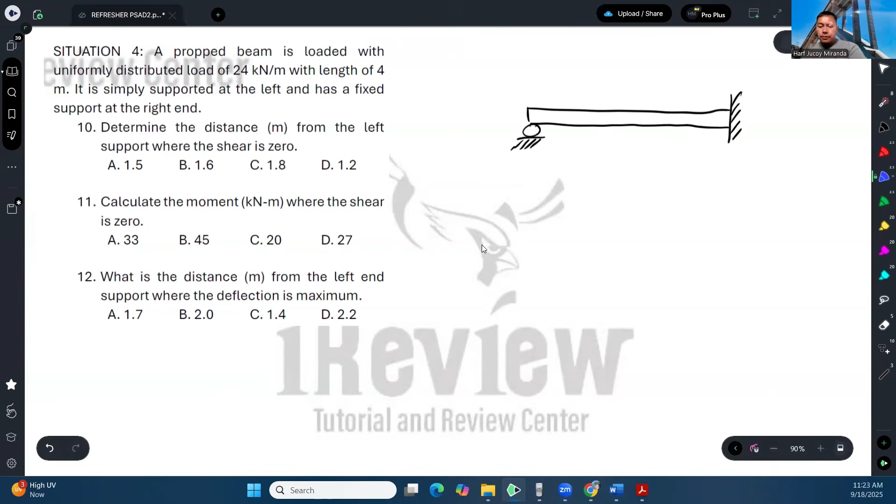There's a uniform load. So determine the distance from the left support where the shear is 0. Calculate the moment where the shear is 0. At what distance from the left end support is the deflection maximum. Those are the questions.

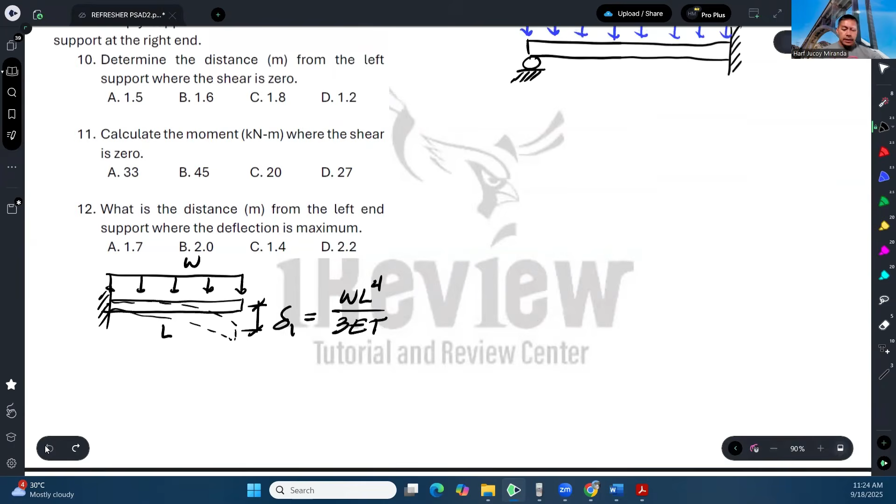So the deflection, delta 1, equals... since this is L, equals WL to the fourth over 8EI. Sorry, not 3, it's 8EI.

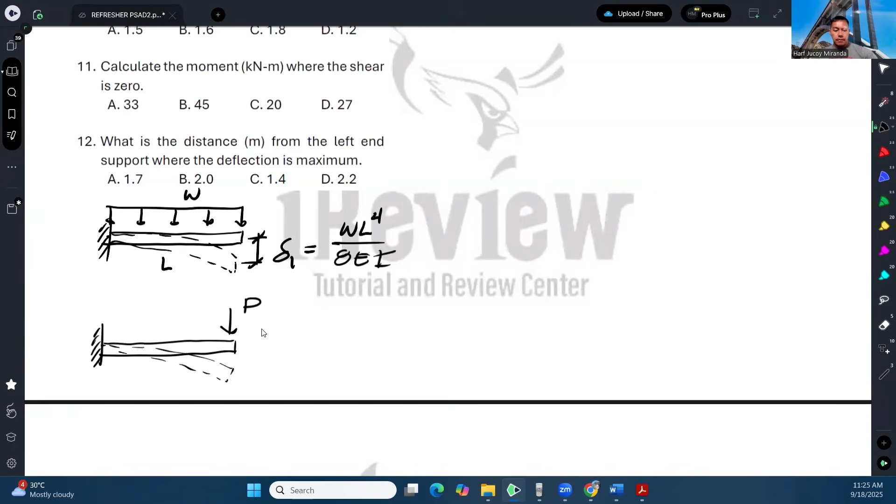Then for a cantilever with load P, the deflection becomes PL cubed over 3EI.

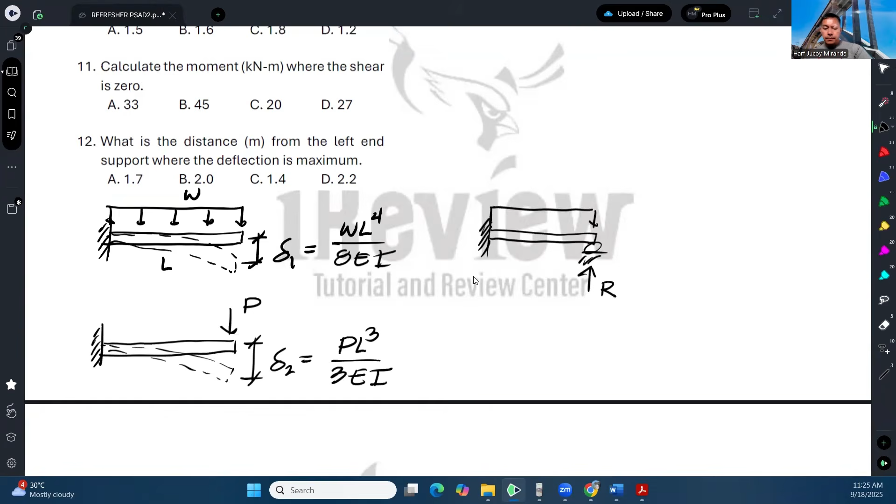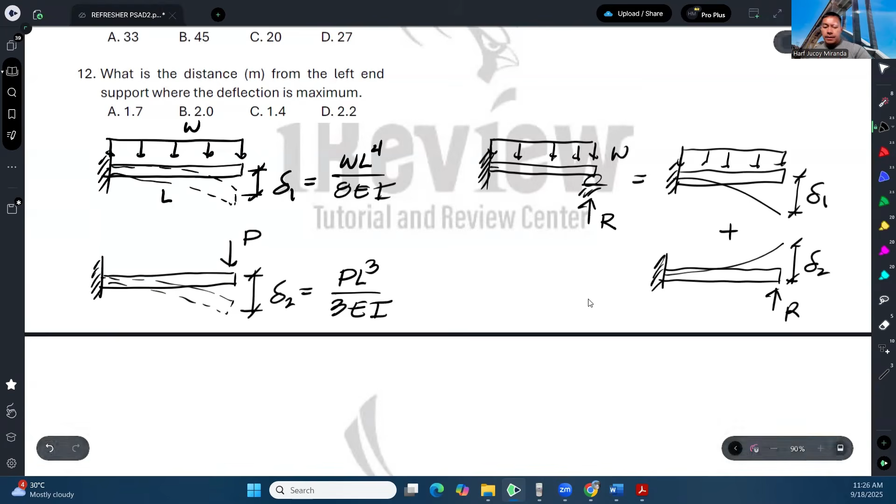Plus the reaction at the support, R, which will also deflect — that's delta 2. Since in reality, originally, there should be zero deflection here, when we add delta 1 and delta 2, it should equal 0. So delta 1 downward plus delta 2 upward equals 0, and we can just equate them.

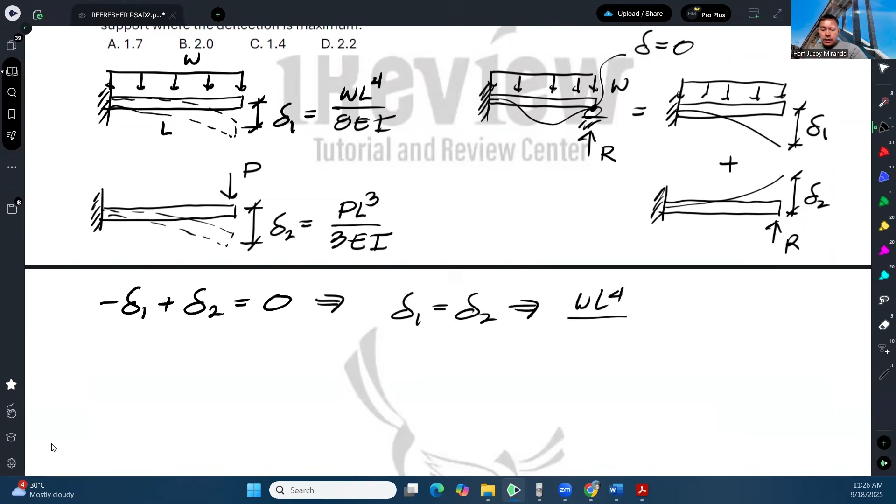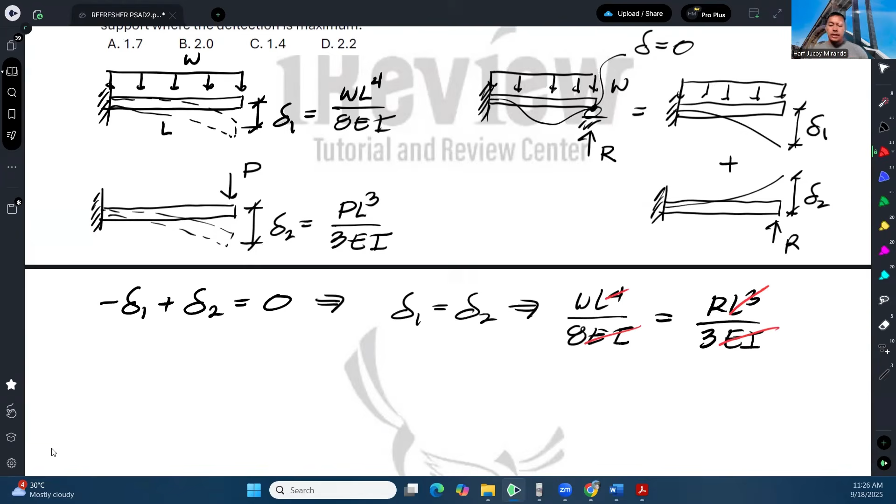So what is delta 1? WL to the fourth over 8EI equals R L cubed over 3EI. Cancel the EI, cancel the L cubed. So the reaction comes out to be 3/8 WL.

That's nice, remember that if you want — it's one less thing to worry about. 3/8 WL. So in this case, our L is 4 meters.

So we can now compute the reaction here. By the way, if that's 3/8 WL, by summation of forces, the other side becomes 5/8 WL, since 1 minus 3/8 is 5/8. So 3/8 WL gives us 36, and the other side gives us 60.

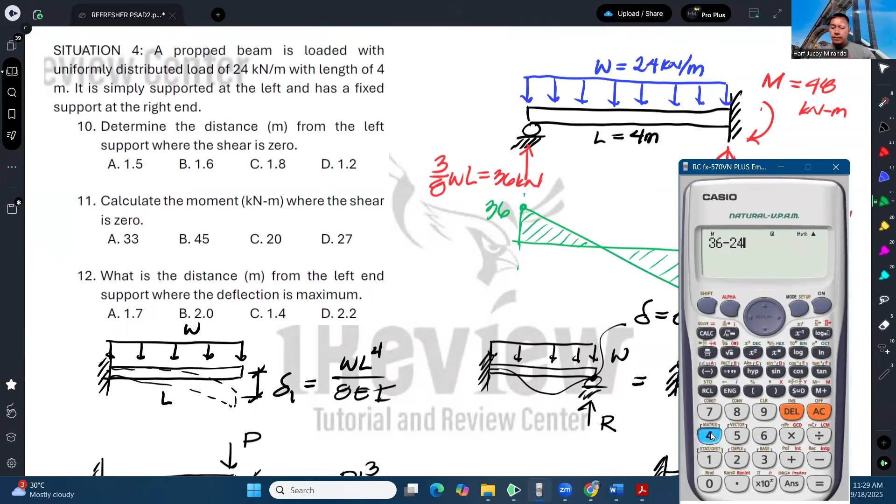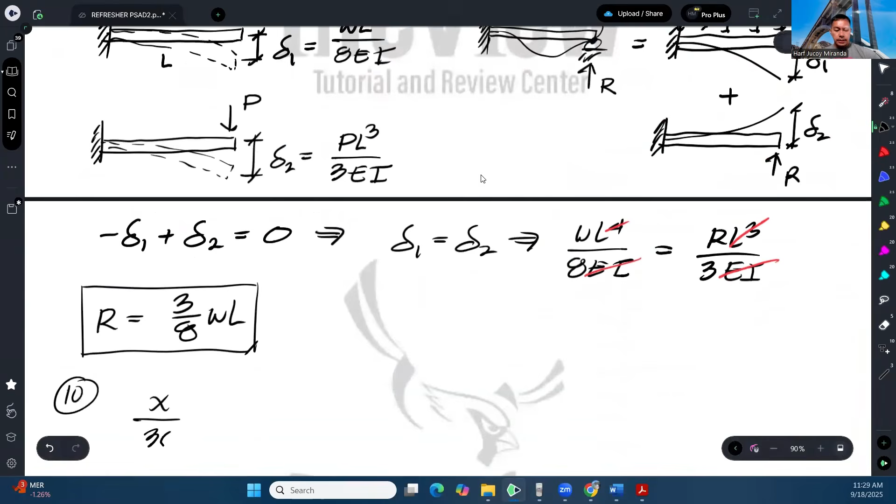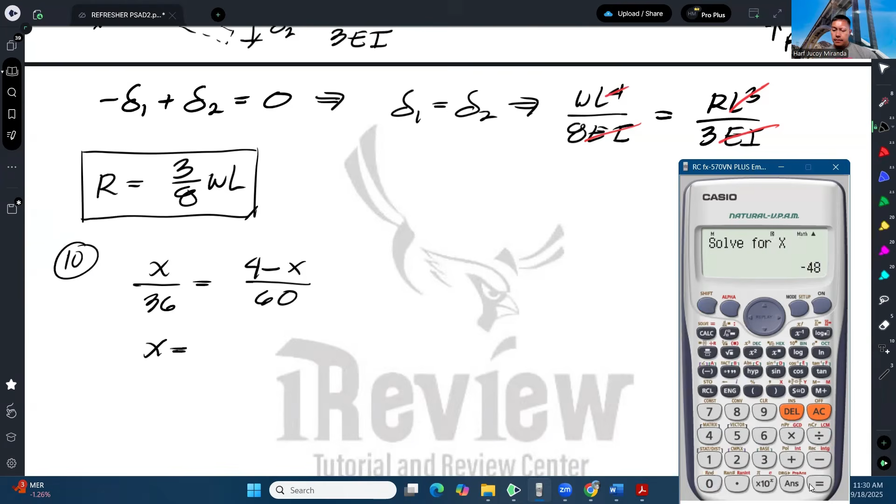To find that, let's call it x, so this is 4 minus x. Then obviously we just use ratio and proportion. So x over 36 equals 4 minus x over 60. Solving for x, we get 1.5 meters. That will be our answer for number 10.

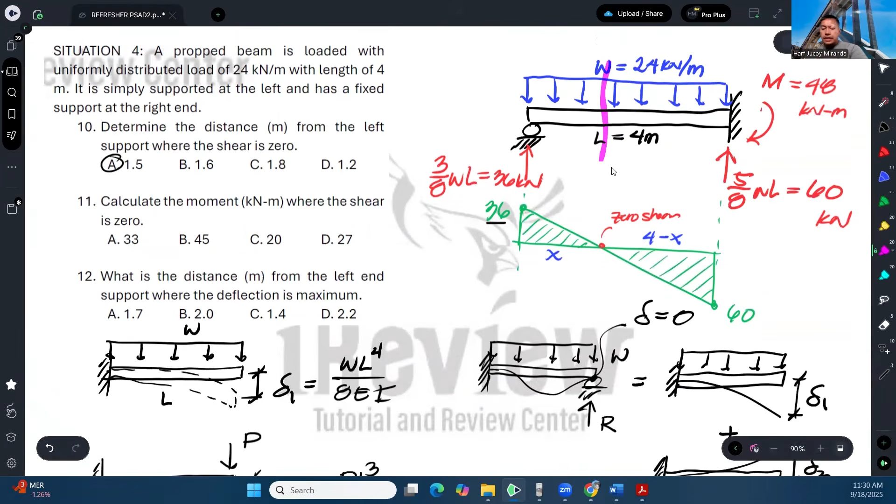So hahanapin mo lang to. Pero alam mo na dito, yung shear mo 0. Okay, so point of zero shear kasi natanong.

So summation ng forces y equal to 0. So we have 36 upward minus 24 times x equal 0. So lalabas dyan, 1.5 pa dun. Pwede mo to gawin kung ayaw mo mag-shear diagram.

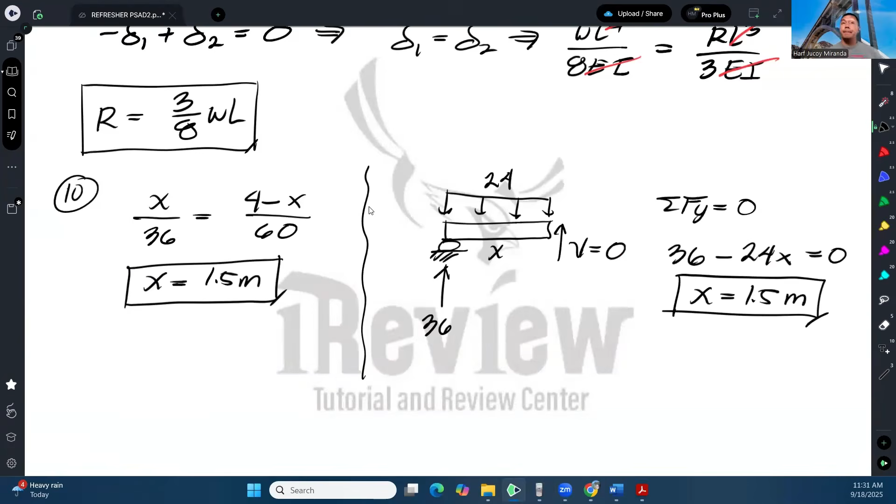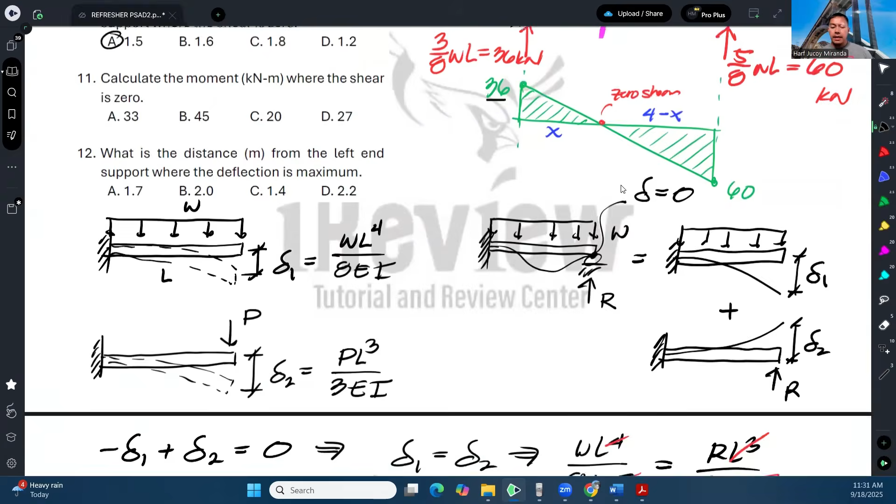Okay, next, calculate the moment where the shear is 0. So actually, para makuha natin yung moment doon, pwede natin ituloy na lang to. Mag-moment diagram. So yung magiging moment dito, copyan ko na lang to. Copyan natin to lahat.

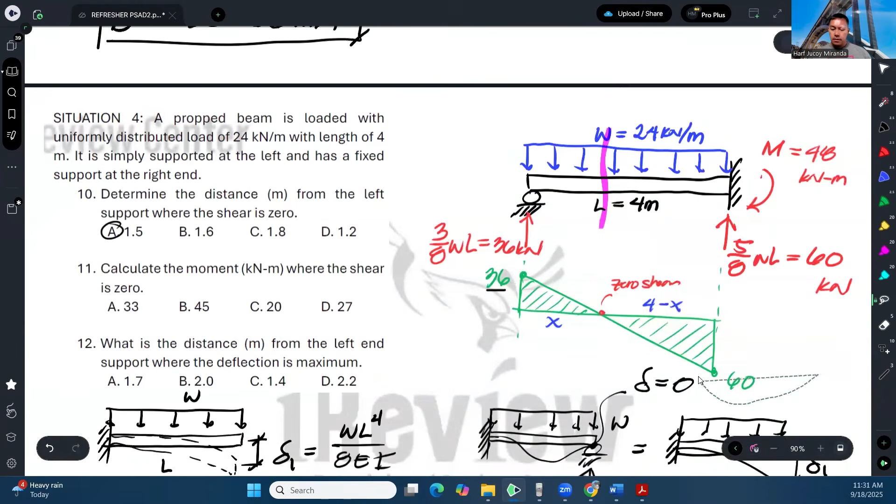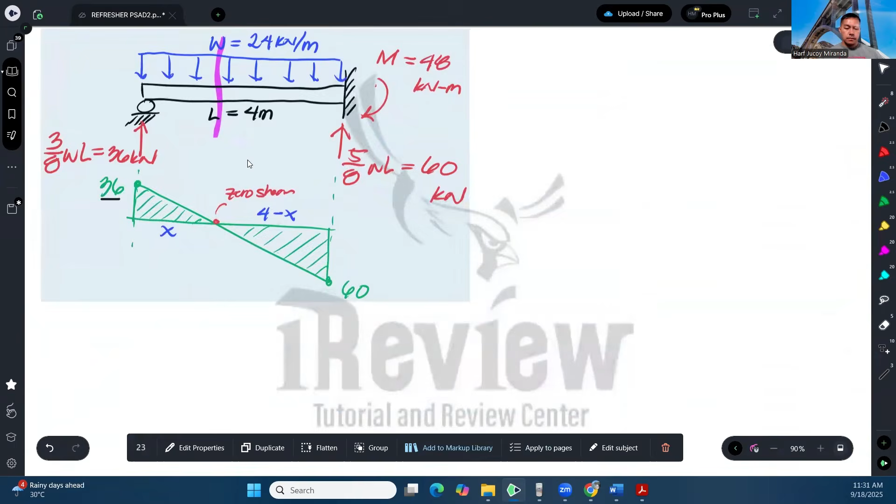Okay, so pwede natin to ituloy into a moment diagram. Okay, so basically, yung magiging moment dito is yung area lang yan. So which is 1/2 ng 36 times yung x na 1.5. So 27.

Okay, 27. So ituloy ko lang yung moment diagram. Tapos, ima-minus naman natin tong area na to. Minus 1/2 ng 60 times 4 minus x. So negative 48.

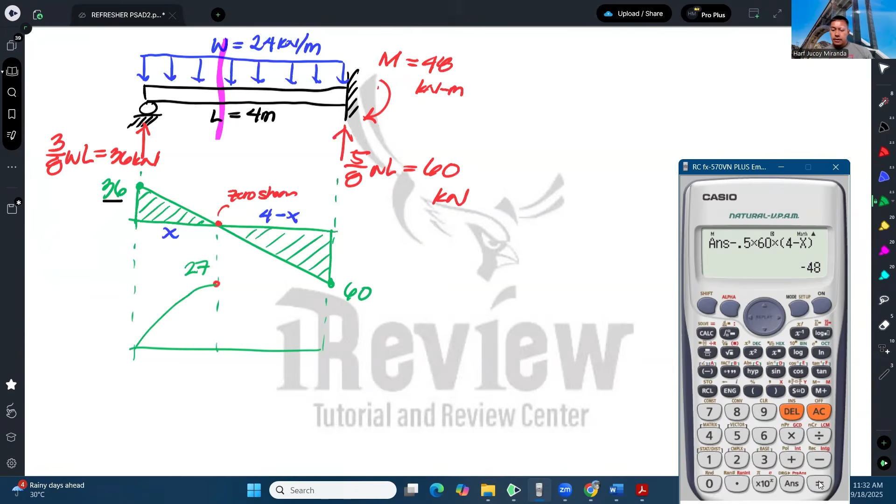Okay, tapos meron tayo ditong positive moment. Positive moment yan. Meron tayo ditong positive bending. Positive bending, ibig sabihin, ang effect nito, ang ano pala sa pagdodrawing ng moment diagram, if we would recall, meron tayong sign convention na sinusunod. Na kung saan kapag nagdodrawing tayo ng moment diagram from left to right, we are using clockwise to be positive and counterclockwise to be negative.

So in this case, clockwise kasi to. Kaya magpa-plus ka ng 48. So pag nag-plus ka ng 48, mag-zero yan. So ito yung moment diagram. So ang sagot lang doon sa tanong, ito, 27.

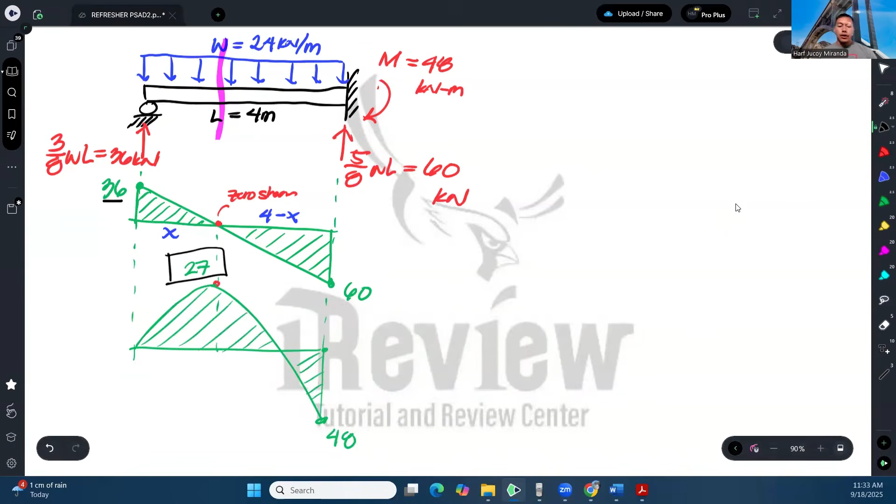Okay, or alternatively, pwede mo tong ituloy. Method of section kasi nandyan ka na. Pwede rin yan. Ayan. So, hindi lang naman shear yun nandito. May moment din dyan.

Okay, may moment din dyan. So, yung moment na yon, makasolve mo. Pag nag-summation ka naman ng moment, doon sa point of zero shear.

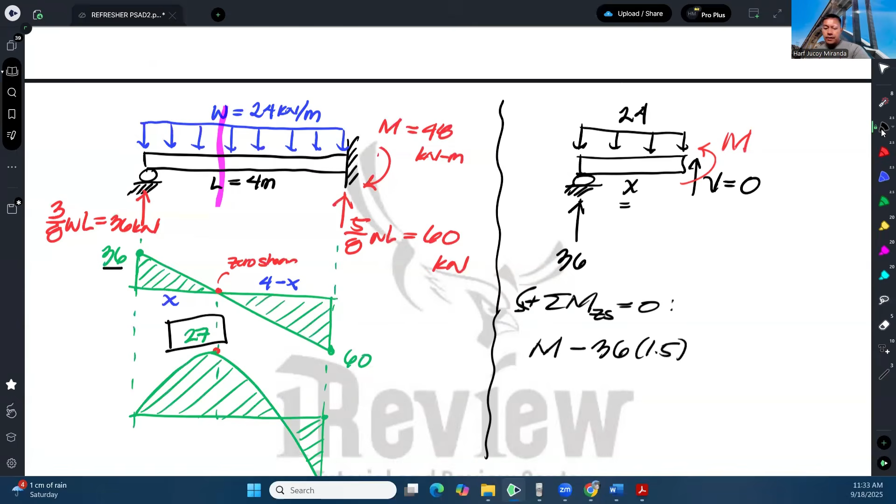Okay, assuming counterclockwise positive, we have M minus 36 times yung X na 1.5. 1.5 na to. And then, plus 24 times 1.5 times 1.5 over 2 equals 0. So, you can solve for M. And same answer.

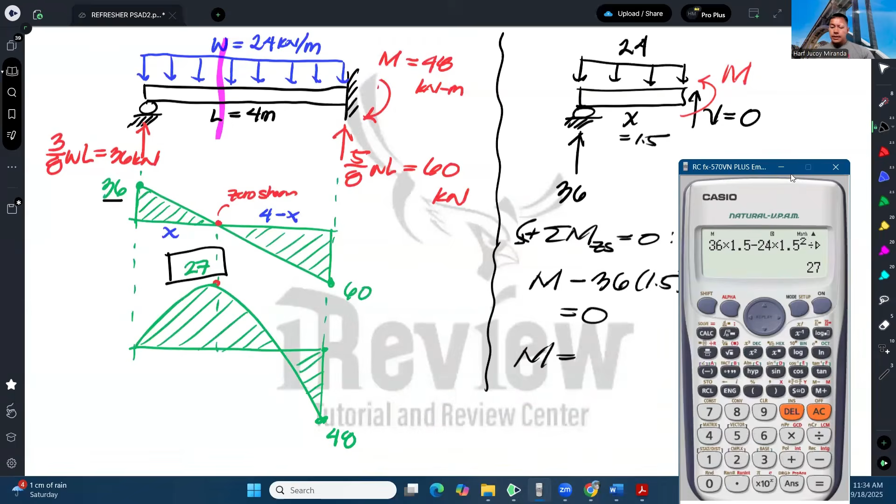Okay, so for number 11, that's 27. Letter D. And lastly, what is the distance from the left end support where the deflection is maximum? So, dito, mag-analyze tayo ng deflection.

So, marami tayong option pagdating sa number 12. Pwede tayong mag-area moment method, pwede tayong mag-double integration, pwede tayong mag-conjugate beam method, etc. Kayo na bahalang mamili. Sa case na to, I'll just do double integration method. Madali lang naman yung double integration method dito.

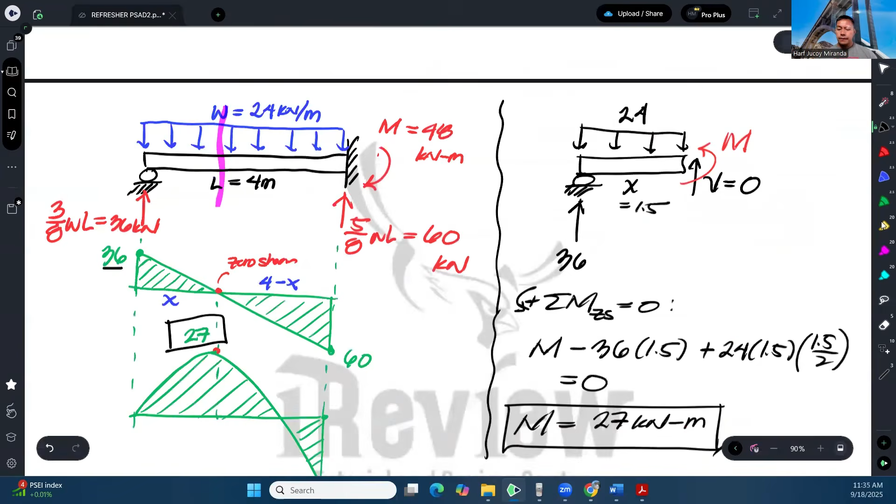So, to start off, let me just redraw the beam. So, meron tayo dito reaction na 60. Meron tayo dito moment reaction na 48. Tama ba? Baliktad. 48. Tapos, meron tayo dito reaction na 36. And then, meron tayo ditong uniform load na 24. And this is 4 meters.

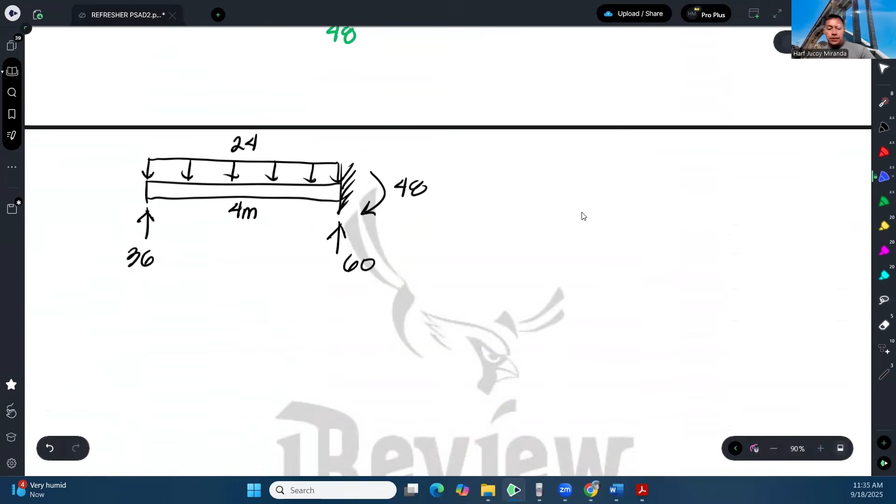Okay? So, pag mag-double integration method, kukunin lang natin yung moment, tapos magka-cut tayo sa right before the right end, bago makarating sa dulo. Bali dito ka magka-cut. Yan, dyan. So, tatawagin natin nga itong distance na to be x.

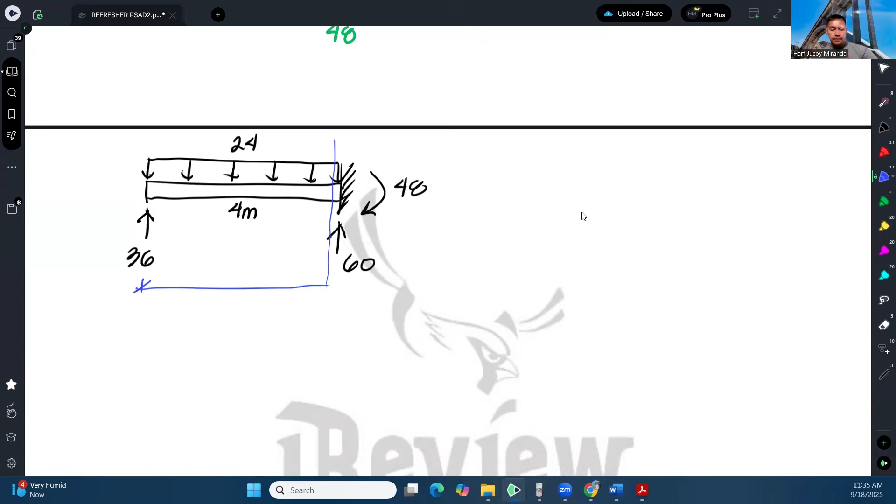Okay, tapos yung moment ay equal sa EI y double prime. Okay, so sa pag-moment dito, ang convention natin dyan is kapag from left to right tayo, counterclockwise is positive and then clockwise is positive and counterclockwise is negative.

Ang pwede nating isipin dito is kapag ka meron kang beam, in-applyan mo ng counterclockwise kasi dito ka nag-cut. So ano mangyayari sa beam? Di ba gaganto siya?

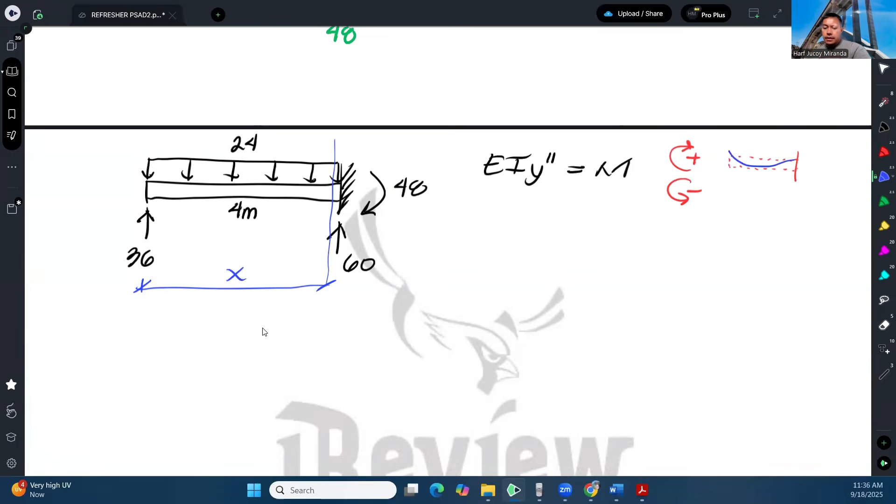Gaganyan siya, magi-smile siya, kaya positive yung clockwise, ibig sabihin positive bending. While on the other hand, kapag in-applyan natin ito ng counterclockwise sa kaliwa, magiging itsura niya ganito, magiging sad siya.

So that's why minus siya, negative bend. So yun yung palatandaan na kasi madalas pwede ito makalimutan kapag nagdo-drawing ng moment equation. Dito kasi sa moment equation na to, importante alam natin yung sign convention para sa dulo, pagka nakuha mo na yung deflection, positive deflection means upward, negative deflection means downward. Ganun lang yun, yun yung sinusunod tayo.

Pag double integration method lang to. So anyway, gawin na natin. So magmo-moment tayo dito mismo kung saan tayo nag-cut. So dahil dyan tayo nag-cut, wala na to, wala na yan.

Okay, so now ano ba ang moment dito? Tinutukoy natin dito na moment. Ito, moment na yan. So we have EI, Y double prime equals 36 times X. Tapos ano siya, clockwise siya, kaya positive.

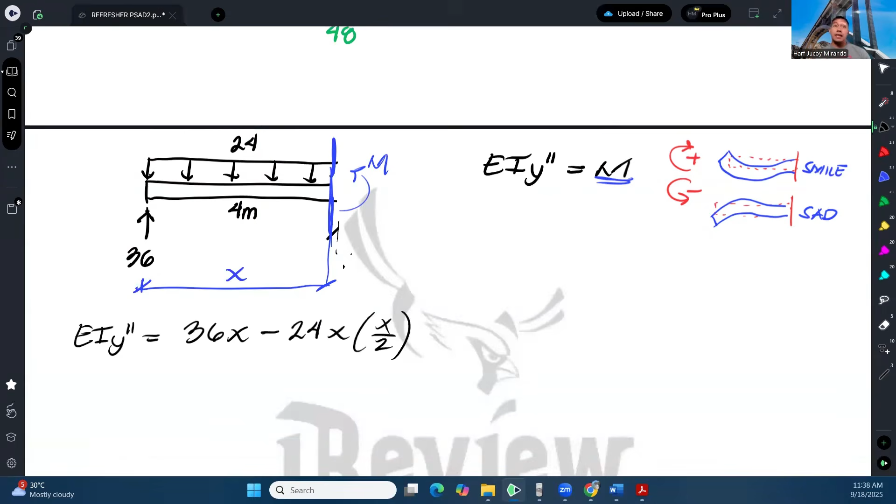Okay tapos yung 24 times X over 2. Hindi na ako maglalagay ng singularity function kasi lahat naman sila, wala namang napuputol na force, lahat naman nasa dulo tsaka all throughout. So tapos ito, ang rotation nito ay counterclockwise, so negative. Kaya nga madali yung double integration method dito kasi maiksi lang siya.

So iayusin ko lang, this is 36x minus 12x squared. So ngayon, kapag in-integrate natin one time, magiging 36x squared over 2 minus 12x cubed over 3 plus a certain constant. Pwede mo ituloy, pero ito.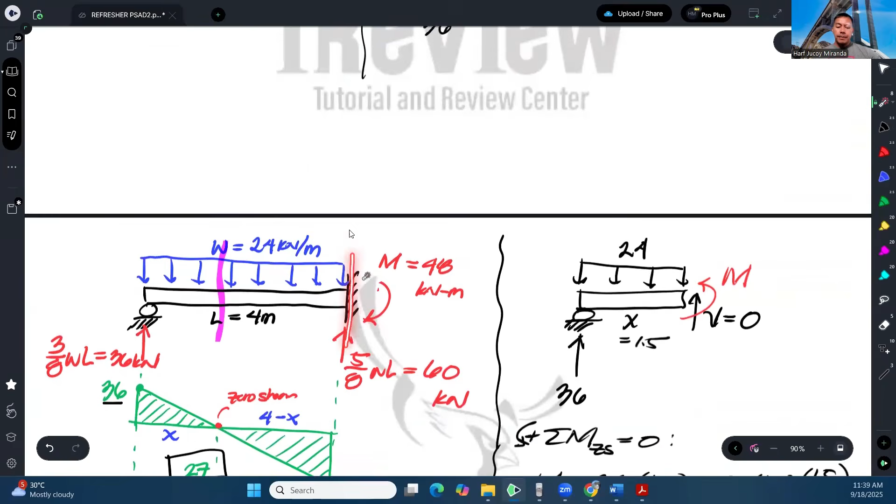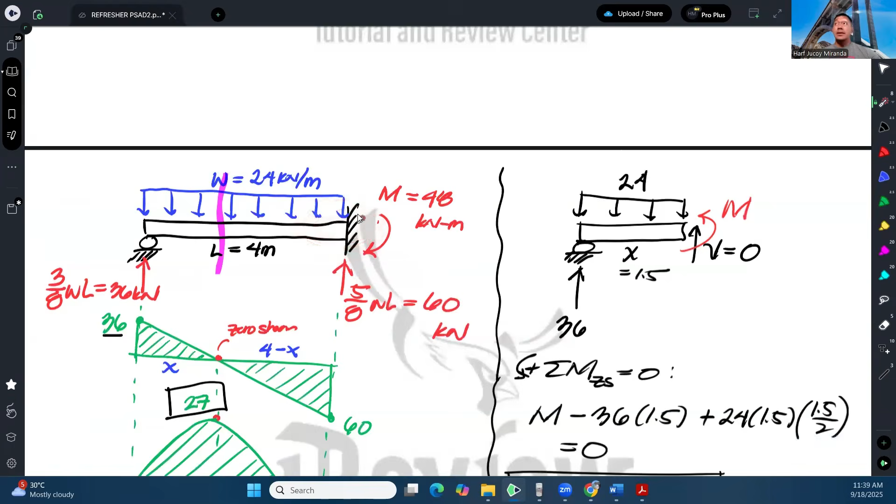I will take advantage of the fact that our beam is cantilever. Kapag cantilever may fixed support, meron tayong boundary condition dito tungkol sa slope. Di ba pagka fixed support, ang slope diyan zero. Eh di ba ito na yung slope, slope na 'to.

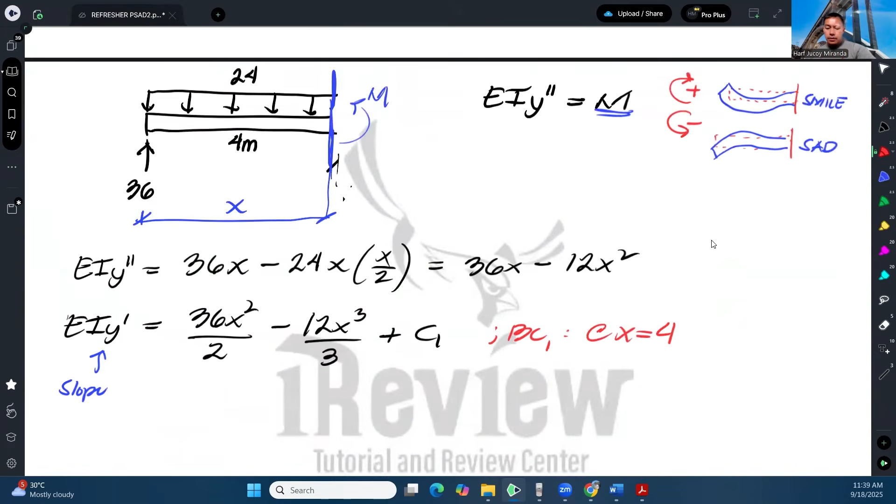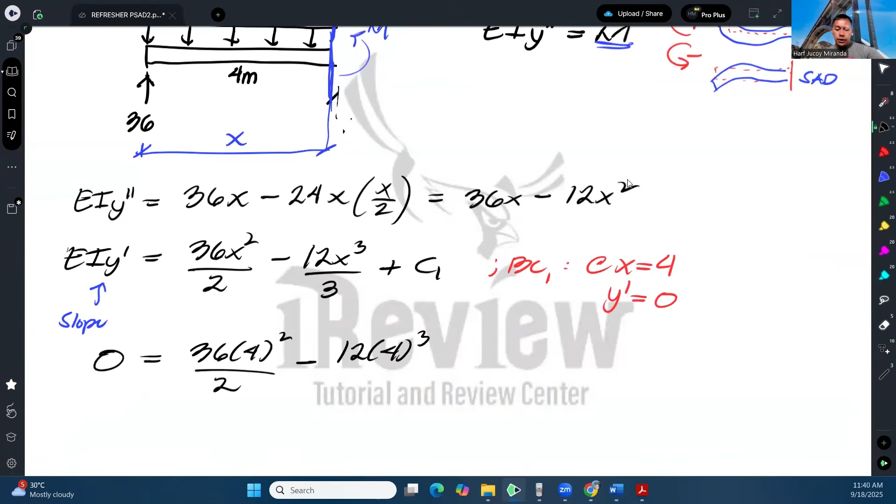Okay, so we can say that the boundary condition we can use is at x is equal to sa dulo, 4, yung slope natin 0. And from here we can take advantage in solving for C1. So we have 0 is equal to 36 times 4 squared over 2 minus 12 times 4 cubed over 3 plus C1. So we can solve for C1.

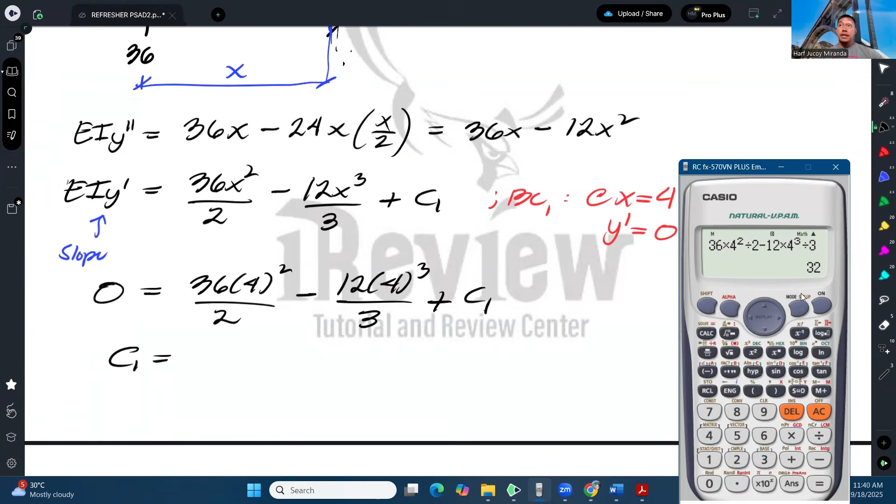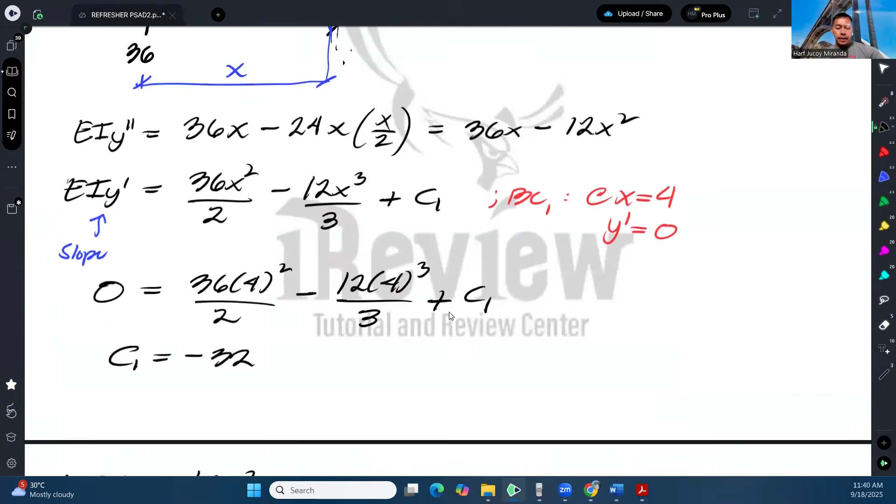Okay, ito yun, tapos pag transpose mo sa kabila, magiging negative. So negative 32, yun yung C1 natin. So ibig sabihin, yung slope equation natin ay equal sa, i-simplify ko na to: 18x squared, ito naman 12 over 3 is 4x cubed minus 32.

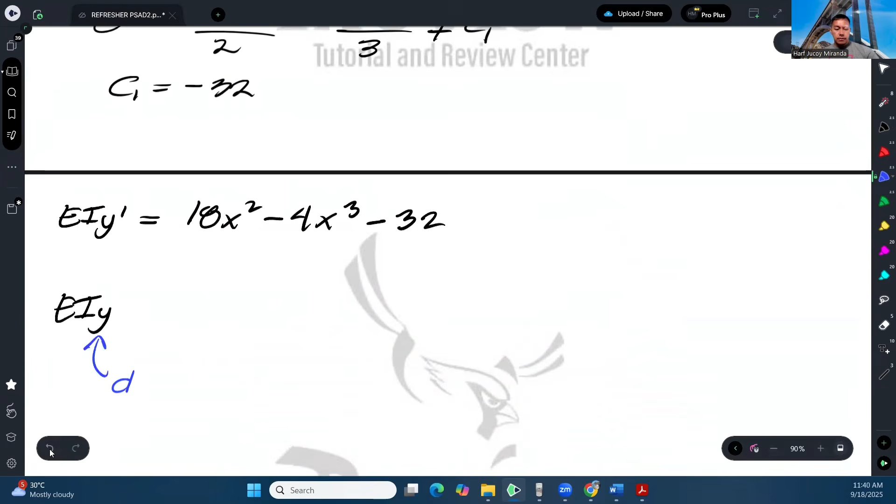Okay, and then pagkatapos yan, kukunin mo naman yung EIY, ito naman yung deflection. Di ba, ang gusto mong mangyari, ma-maximize yung deflection. Ayan, ma-maximize yung deflection. Paano ba tayo mag-maximize ng deflection sa calculus?

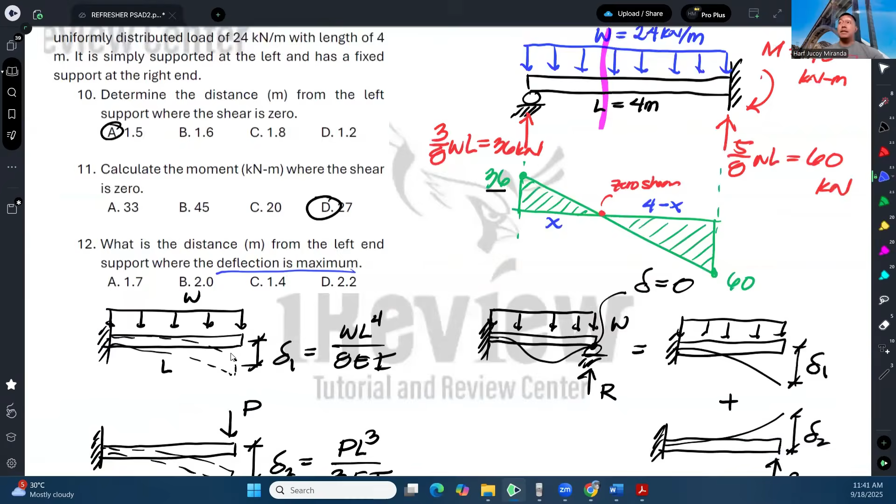Di ba, para ma-maximize mga isang parameter, kailangan mo siyang i-derivative, tapos equate mo sa zero. Eh ano ba tong derivative na to, di ba yun yung y prime? So ito na yan, di ba? Kaya kahit wag na natin kunin yung deflection equation, hinahanap lang naman saan siya maximum ang deflection. So ang gagawin ko na kagad, isi-set ko na to sa zero.

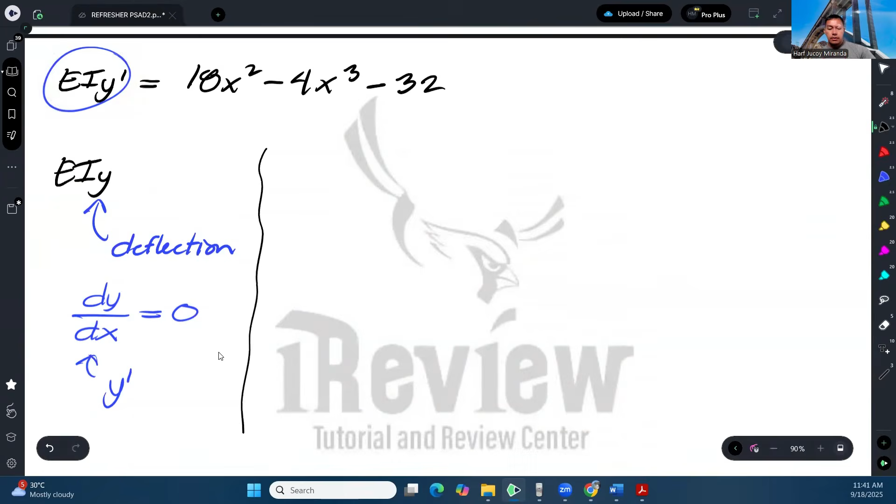For maximum deflection, y prime must be zero. So 0 is equal to 18x squared minus 4x cubed minus 32 is equal to 0. So we can solve for x.

Actually, tatlo yung x dyan kasi cubic yan. Yan natin lahat, solve natin lahat, mode equation cubic. So yung x cube natin negative 4, yung x squared natin 18, tapos wala tayong x, tapos yung constant natin ay negative 32.

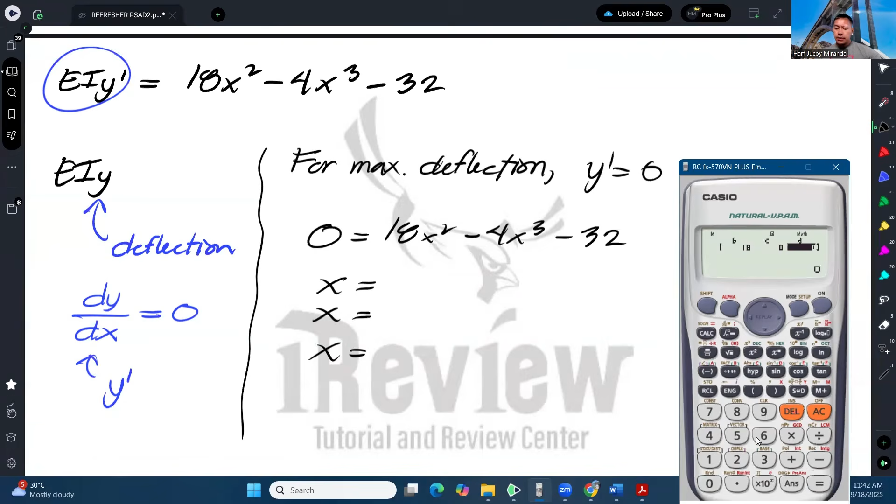So yan, so we have 1 negative, negative 1.19. We have 4. And then we have 1.69. So, of course, ito hindi natin tatanggapin kasi wala namang negative na distance.

Ito naman, ito yung sa fixed end, which is we verify na sa fixed end, zero yung slope. Di ba? And at the same time, saan pa zero yung slope? Dito. So ito ngayon yung maximum deflection natin, location ng maximum deflection.

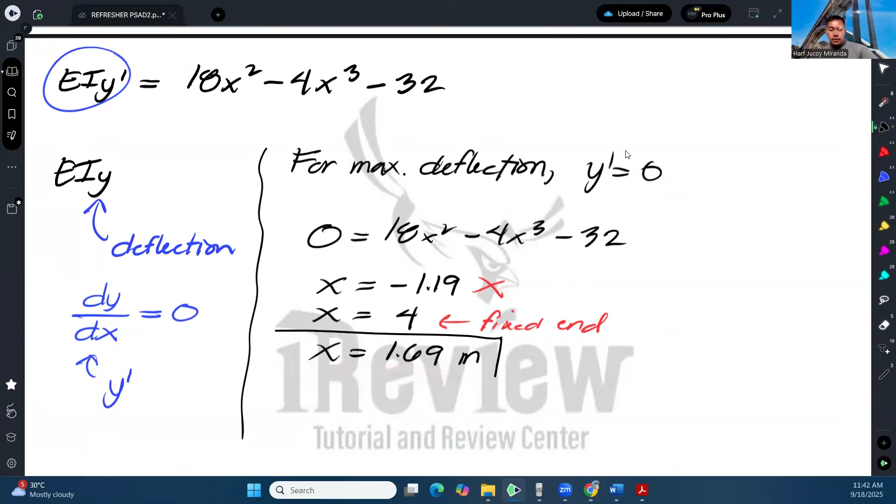Kumbaga, parang ganito kasi yan. Kapag nag-deflect kasi tong beam na to, ganito yung pag-deflect niya. Horizontal dito dahil sa fixed support, tapos mag-deflect. Ayan, ganyan yung deflection mo.

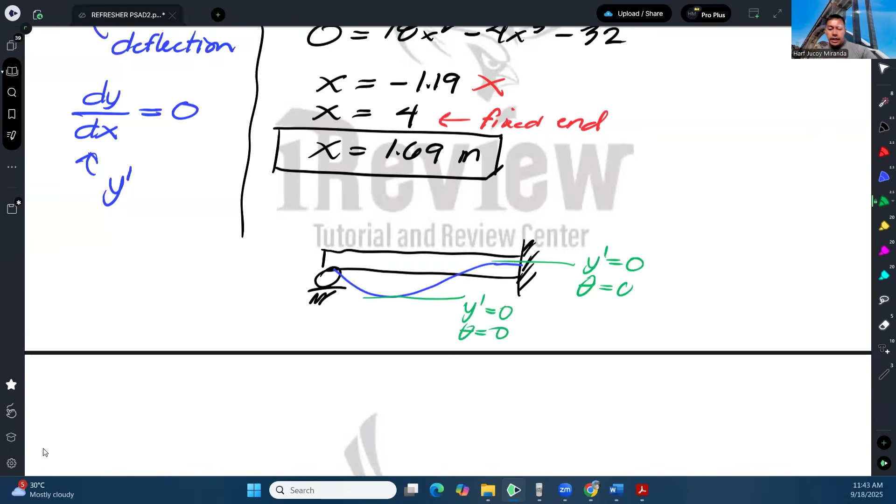Okay, so dito, y prime is 0, yung slope mo, 0. Dito rin. Okay, and located yun saan? Ito yun, 1.69. Ito, saan ko located? Yung isa pang 0 sa 4 meters. Kaya ito yung dalawa.

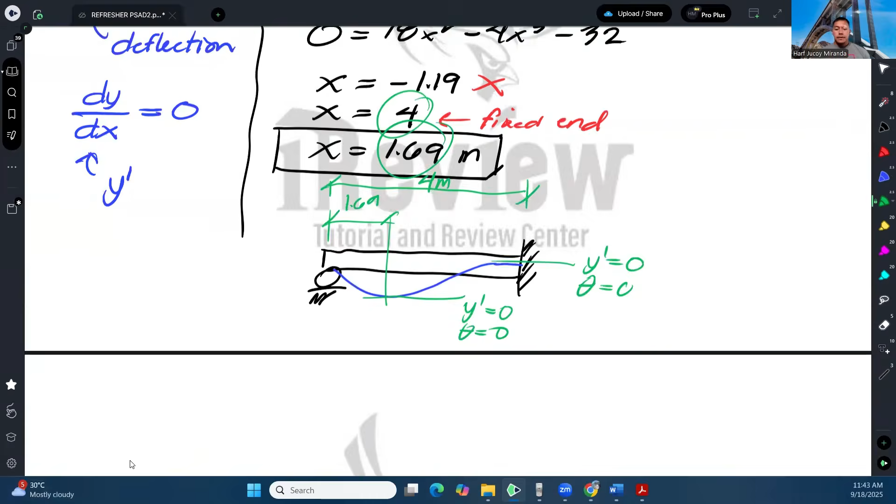Okay, so anyway, our answer for this question would be 1.7. And that's how we solve this problem.